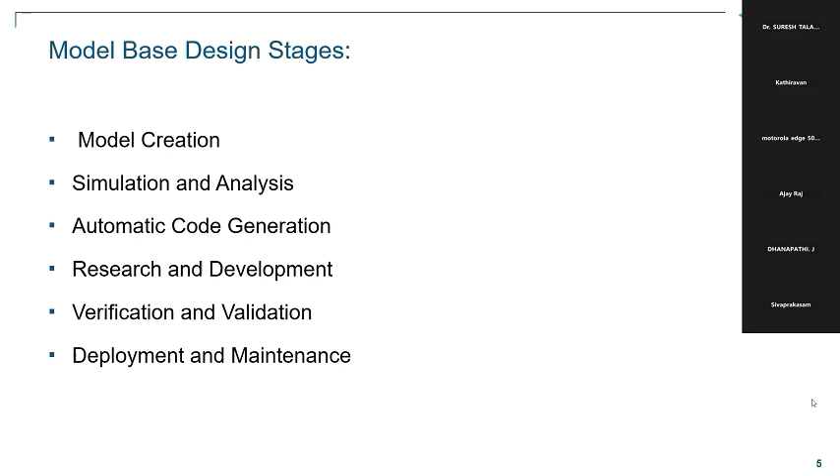In the development of this complex system, by leveraging the power of abstraction, simulation, and automated code generation, these three things can be directly achieved when you are adopting this model-based design. So, coming to the next slide.

As we've been stating model-based design for a long period - what is this model-based design tool we're actually talking about? Which particular tool are you concerned about? Actually, we have one such tool, but there are several other tools in the market as well.

Many tools are in the market supporting this model-based approach, like LabVIEW and SolidWorks - they support model-based design. We have one tool from MathWorks called Simulink. MATLAB - we have three products from the house of MathWorks, I think most of you know this. The first product is MATLAB, the second is Simulink, and the third is SimScape.

So out of three, Simulink and SimScape will give you that flavor of model-based design. MATLAB is a traditional software which has been in the industry for more than 40 years. Wherever you need mathematical support or complex mathematical analysis, development of algorithms ranging from simple to AI, we can do with this MATLAB software.

And Simulink gives you a flavor of a block-based environment. So everything will be in Simulink. Most of you have a handful of experience with this particular software. Here you have the blocks. Everything will be available as blocks. Just pick and plug these blocks, connect them, set the parameters, and you can play with them. Once you are ready, you can simulate.

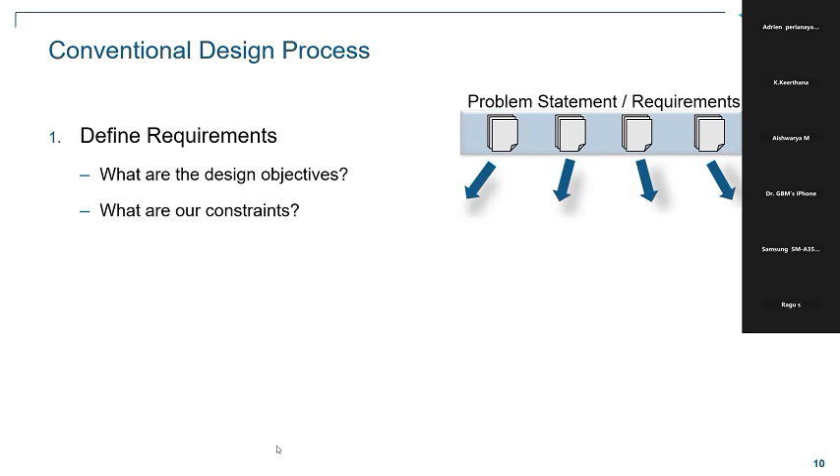The second level will be the component design, and the third level we go for system integration. We need to fuse hardware and software and make a system out of it, that we call an integrated system, which works with hardware based on support from software commands, and the hardware will work. So we make an integrated system, and finally we will test it.

So this is the conventional design process. We need to identify the requirement and go with the component level designing, do system integration, hardware software integration, and go for testing. So this is our conventional design process for any type of automobile manufacturing.

So today we are taking a scenario of EV car, which is very trending now, right? So what happens? What is the problem? Here you can see each stage has a different problem.

If you take the requirement phase, the analysis on that requirement - whether whatever choice we have made is right, whether the component we have chosen is right, and integrated with the design, whether the component we have thought of and the design we have made,

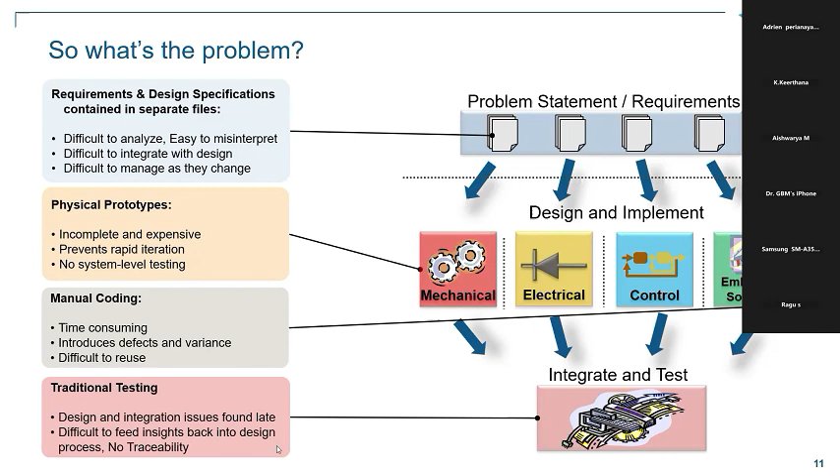Suppose you are moving to a new version of the model - if you don't have an integrated platform where hardware and software can be tested together, then no traceability will be there, and your learnings will not help for your new version. That's why aftermarket products are getting defective if you are not using this methodology of model-based design. So those are the problems.

So as I was stating, you need to fix on the requirements. If you fix the requirement properly, you'll be left with only about 10% of issues to fix during testing. So in the conventional methodology, you need to ensure your requirement and design cope up 100%. Then you won't need to worry about testing.

Yes, how to achieve it? That's the next question - how will you actually achieve it? How can you ensure your requirement and design are working properly, and where can you test that your hardware and software are working fine? How can you reduce the deployment time of your software or program to your model, your control system, automation, car, or whatever your product is about? How can you reduce the time between hardware-software mapping, and how can you reuse your existing model for the new one? That is very, very important.

So if you see here, this graph gives a glimpse of how error can significantly make the project go down. Here we have given the phases - in this graph, the y-axis shows the relative cost to fix an error.

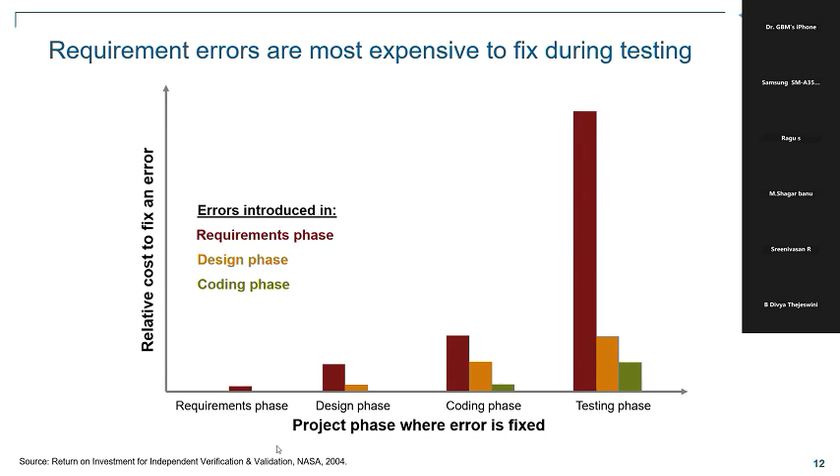Here this model-based design will come into play. This will help you to fix it actually. You can share it. You can take a model-based design tool like Simulink and Simscape, or you can go with other software like LabVIEW and SolidWorks, which help you make these simulations. Multi-domain simulations will help you.

You can actually build a model in that particular software, and you can make some easy integration. You can actually do that with the software, and you can check whether your requirements and designs are okay.

That's where nowadays we are getting new products. Within 3 months we are getting a new version of mobiles available. Within a year we are getting a new version of cars. How is it possible? By adopting this technology called model-based design.

What is the stakeholder's idea? What is the idea behind it? Go to the software, open this model-based design tool like Simscape or LabVIEW or SolidWorks — there are several other software also. You can open those software and try to build that integrated model along with your electricals, controls, software, and mechanical parts.

Just to give a heads up, Simulink will give you all the control platforms, and SimScape will help you work on real environments like mechanical systems. If you want to build a robotic system, yes, all your robotic parts are available under SimScape tools. You can take that SimScape product, download it, install that version. You can build your entire robotic model in SimScape, and all your control systems can be built with Simulink.

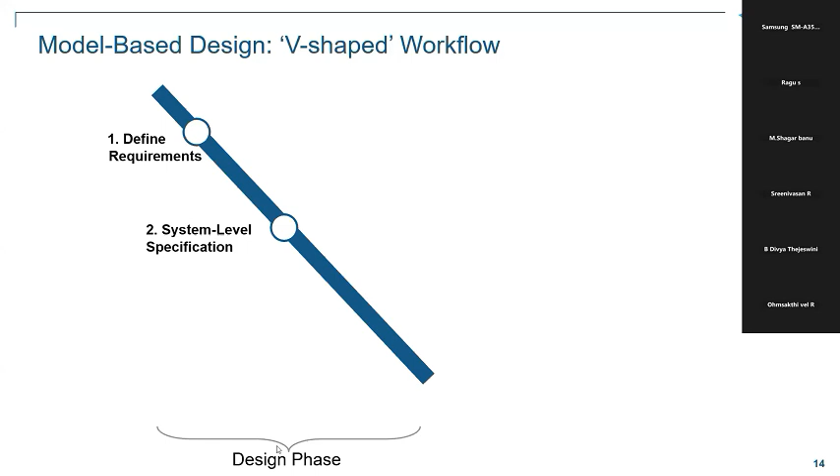Coming to the very important concept for this model-based design, called the V-shape workflow. I hope I am very clear with the concept we have discussed on this model-based design. So what is this V workflow? Why has this rapidization happened in this industry in the past decade?

We can see a lot of things happening, rapidizing, and everything happening at a very fast pace. How is this possible? Have you ever thought how an engineer or technology people can give a product in a very short notice, with high quality and features, at a very low cost? How is that possible?

Most of you have experienced this - people who purchased a mobile phone like 10 years before, for that cost we paid, we got only very basic stuff available in that communication device. But what happened now? Even for a very affordable price, we can get everything available in that mobile and communication tool.

If you look at automobile cars nowadays, slowly you can witness EV car prices getting below 10 lakhs. Slowly, down the line within 5 years, you will see even your kid will have an EV car, with AI power. It will automatically make the drives and take them wherever they want to go. Down the 5 year line, we are going to see all this stuff.

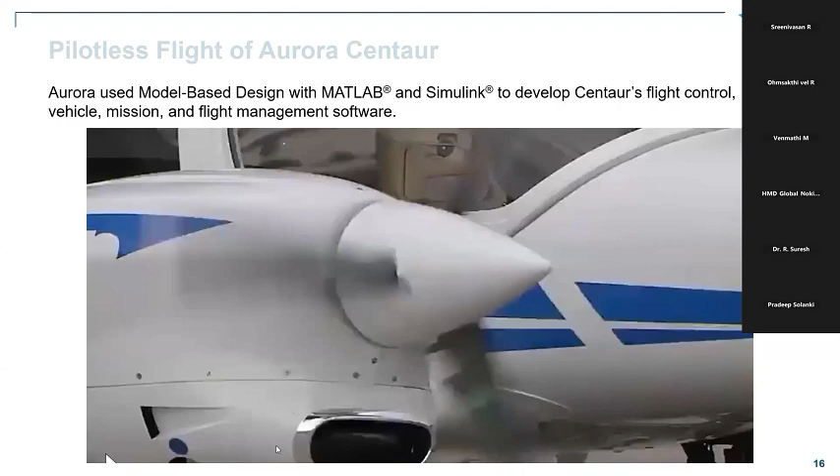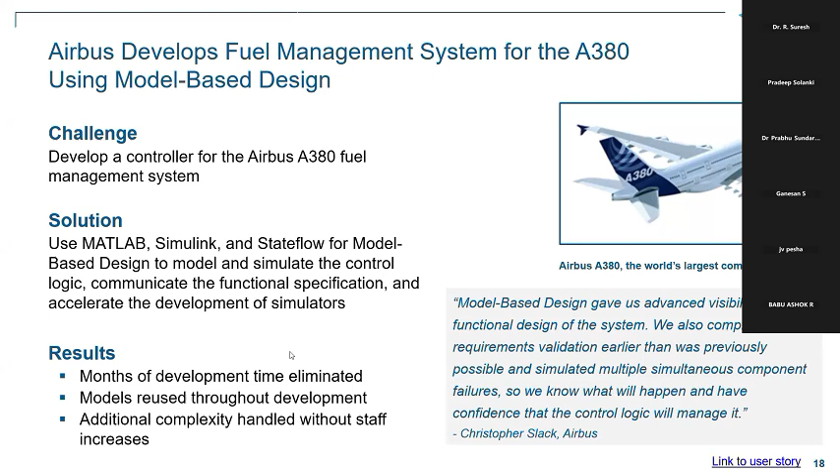So now we have some idea about this software, right? We have already discussed this. So that's all about your model-based design.

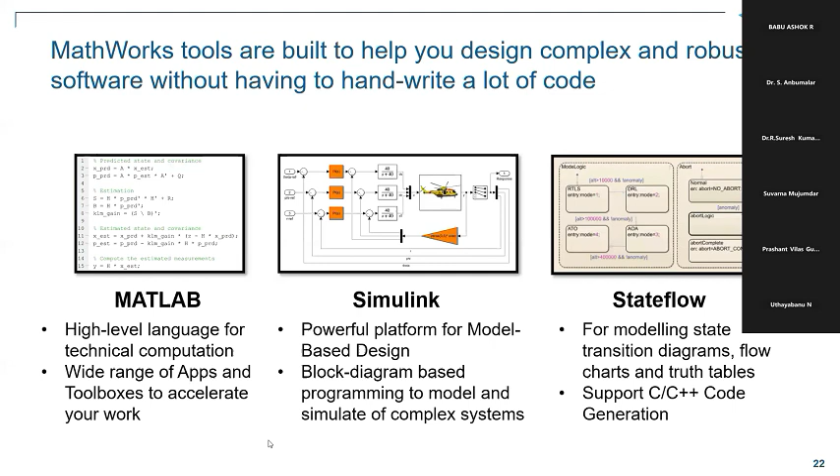That is very simple. MATLAB gives you an option to go with MATLAB Academy. You can just type www.mathworks.com and reach there. There are several self-paced courses available, called on-ramp courses. You can do these courses and understand how to actually start working on this tool. Once you complete them, you will get a proper certificate, and you can start working on this tool for your own model-based development.

Nowadays we are concentrating on several web series available for you, where engineers and tech people can reach us and start doing their own work in their own domain-based expertise. They can come back and check with us, check with our workshop series, and start doing work along with us. We have created resource-based things where you can sync up with us and also grow with us.

That is also possible. And at Manakula Vinayaka, we have a campus-wide license. They are a very long-standing partner with us, and we have set up several trainings and workshops along with them. So people who have the facility to reach Sri Manakula Vinayaka College of Engineering, whenever we conduct a workshop, please reach out to them. We can actually collaborate, and that's how the learning should happen.

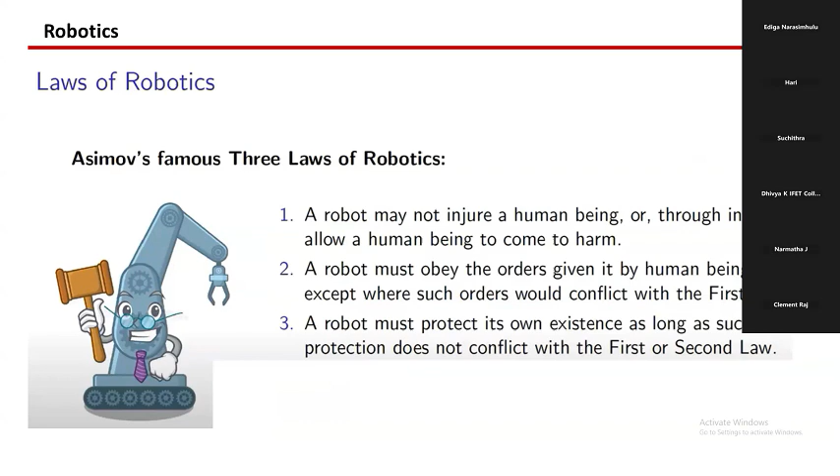So usually here today we are mostly talking about industrial robots. I am going to talk about their evolution.

The first stationary industrial robot was called Unimate. It was invented by the American engineer George Devol - he first invented this industrial robot.

Later on it was developed by the Unimation Inc. company in 1956, by American engineer Joseph Engelberger. He developed this particular industrial robot, then introduced it at Unimation Inc. Also, the first prototype was implemented at General Motors Corporation in 1959, for the die casting factory.

The first production line serial robot was delivered to General Motors in 1961 by the Condec Corporation. Condec was an acquisition of Unimation Inc.

So coming to the thumb rules on deciding robotic uses - there are four environments where we will try to replace human efforts. For example, if the task is really dirty, you can use a robot. Or some kind of dull environment - dull meaning repetitive work.

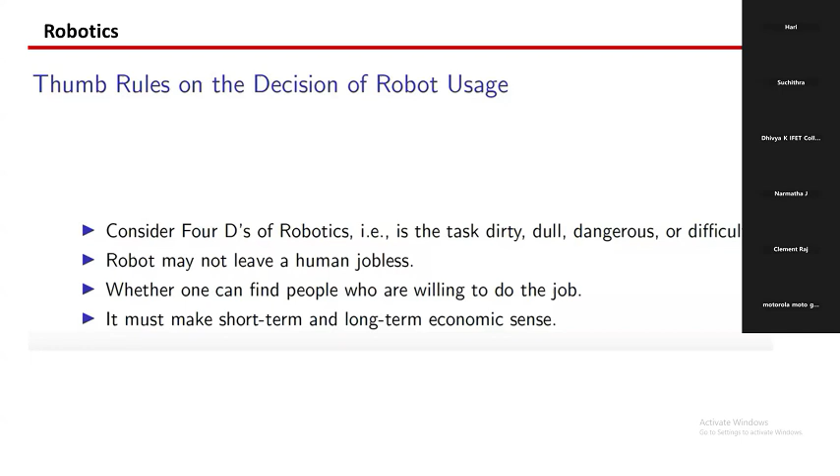But at the same time, the usage of robots should not leave humans jobless. One should find whether people are willing to do the work, and consider how it impacts in the short term or long term economic sense or industry point of view. Based on this thumb rule, you have to select it.

For example, in case of industrial robotics, we can find many areas where people use robotics nowadays. Initially they found it in welding - robot welding, spot welding - also material handling robots. They are using it in picking, painting, and assembly. These are all the applications they have used.

Maybe it's better if I show some video from YouTube - I hope a lot of data is there that might be useful for us. Like, you can show the application here.

So you can find it here. Basically, they are using it for spot welding. You can see how this robot is doing the spot welding, and material handling, like how this cup is exchanged.

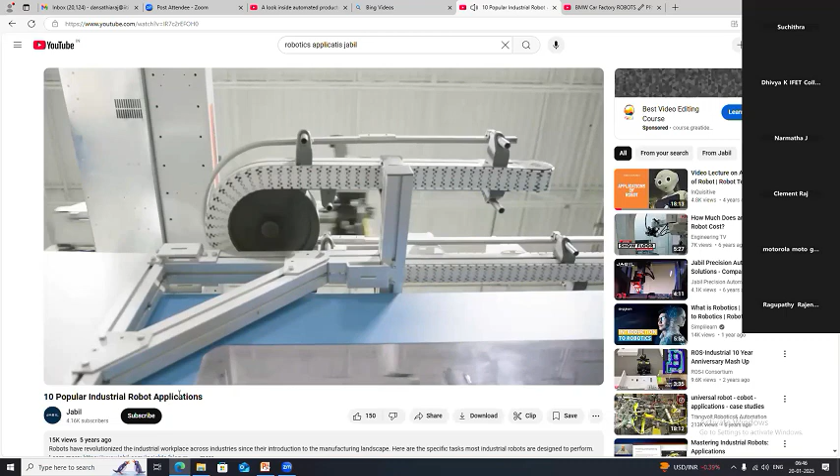You can see machine tending, meaning kind of machine tools. It is used for different machining operations, like different machining tools are there, and it handles these tools. Here they are using it for painting, like this automobile body is painted here.

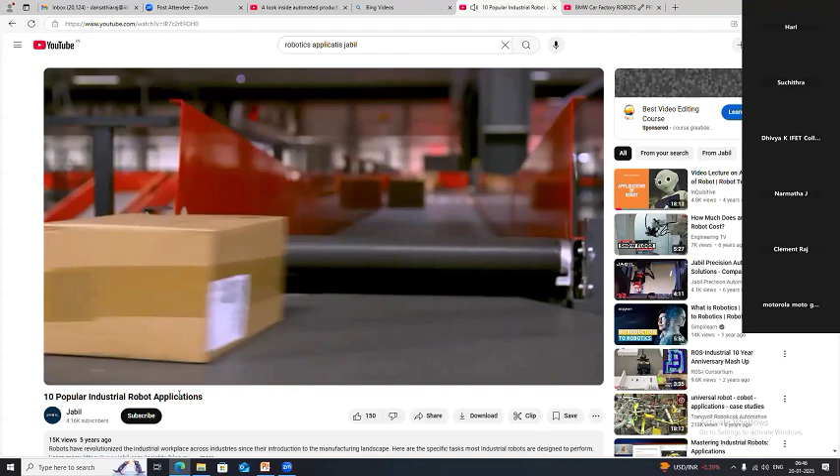You can see here, also this packing, picking, this kind of application, one conveyor to another conveyor it is transferring. Assembly, how it is used in assembly, you can see here.

Also some mechanical cutting and polishing operations, how it performs. You can see the different cutting operations, laser cutting operations, some polishing operations. It is also doing some kind of adhesive sealing, like gluing, just attaching the parts together, kind of assembly operation.

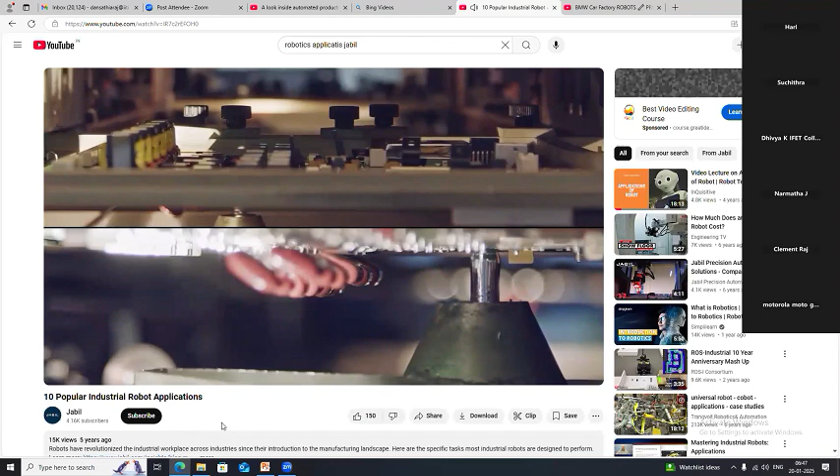Again, it is spraying. Some other applications also, like we can find PCB board assembly. I hope you may know about the PCB parts, made up of very micro electronic mechanical components. For that, we can use this robotics in different applications.

Apart from that, we can use it for medical robots, mining, space robots. These are all advanced applications, like underwater exploration. Nowadays, even our defense has made defense robots, which basically act as a bomb defuser wherever a dangerous job is involved, so it can defuse the bomb. I hope you know the UAV Netra, developed by the DRDO.

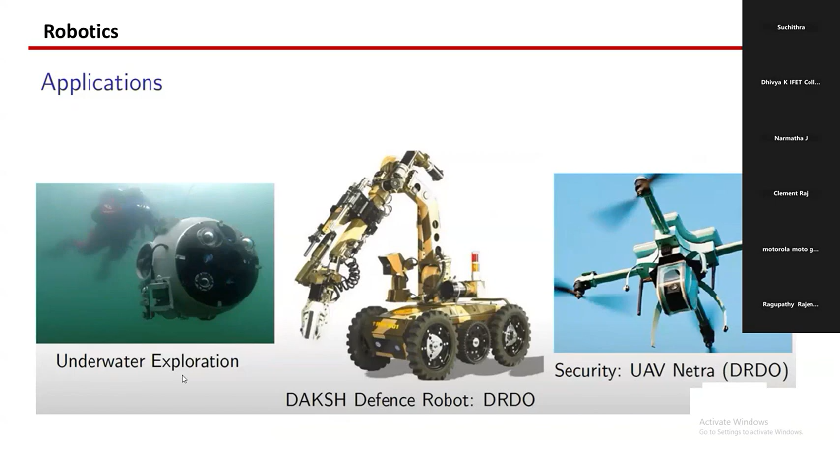This drone is basically for border application, like border surveillance, which DRDO and defense are using nowadays. So these are certain applications of robotics. Also, some robots are used for rescue from ice, and some robots, the bots, are made for agriculture, which can be used for seeding purposes, like it can remove the seed, those kind of operations it can perform.

Like this, in many areas, you can find industrial robot applications. But if you come to the industrial application, here our talk is basically confined to the industrial application.

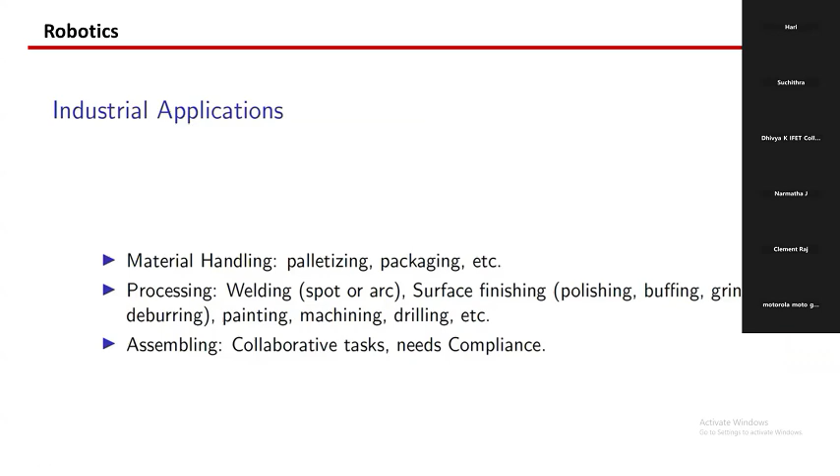From an industrial application point of view, there are three types. One is material handling, where palletizing and packaging are very important. If you come to processing, there are a variety of processes, like welding, machining, or surface finishing, painting, drilling - many operations are involved. Assembly means it has to do some kind of collaborative task and basically needs compliance.

There are two types of robots basically, serial and parallel robot. In industry, we mostly use industrial serial robots. For example, mostly if you take the serial robot, what I'm trying to say is the link is connected to the arm again. For example, if you see the right side diagram, the base is there, and one arm is connected.

Again, the second arm is connected with this link. The third arm is again connected. Then the tool will be connected here. This is basically the pick and place tool, the fifth one I'm showing here. There it will act as an end effector tool.

Here, this end effector, based on usage, you can change this tool. Suppose if you are using a grinding operation, then you can put a grinding tool. Suppose if you are doing a painting operation, then you can keep a spray gun here. Suppose if you are performing a welding operation, then you can place a welding gun in the end effector tool.

So it will act as an end effector tool. Basically, the manipulator has a serial or parallel arm, which is called a robot manipulator. I will tell you what a parallel robot is also. In the serial case, you just understand that it is serially connected, the links are connected with the arms. Then in order to operate these links, we need a controller, right?

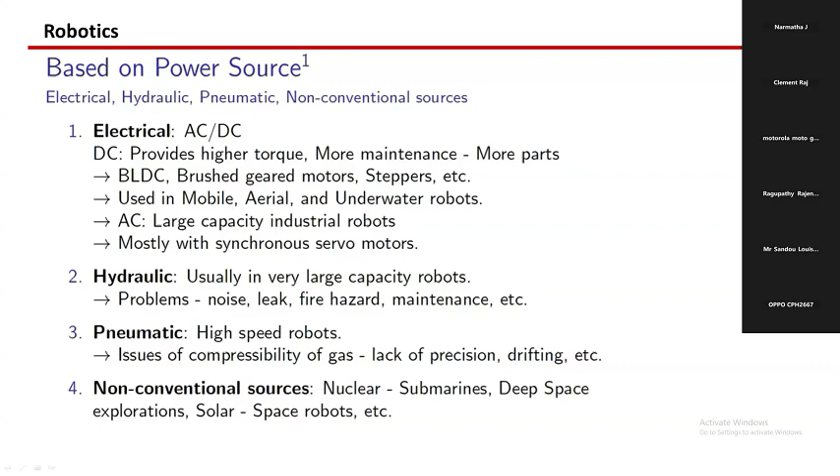Also, apart from hydraulic and pneumatic, you can use non-conventional sources also, like nuclear power or solar. Solar robotics is also nowadays very popular, so you can use those things.

Also based on workspace geometry, you can make it into different types. For example, I can divide into Cartesian robot. Cartesian means nothing but here it has three linear actuators, x-axis, y-axis, z-axis moving in linear, so basically it is a prismatic movement, that's why it is called 3P, like Cartesian means PPP. Mainly this is used for heavy loads because it is very simple to control and easy to program also.

Second one, suppose the workspace looks like a cylindrical shape, that's why it is called a cylindrical robot. Here only the x-axis is fixed, the base is fixed, so it is not a linear movement, it can rotate, and also the y-axis can move and the z-axis can move. That's why one revolute, because here we use one rotary actuator and two linear actuators, that's why it is one revolute and two prismatic, RPP, it is called RPP.

So in that case we can give a more large payload, and it is a very rigid structure also. Third case, we can use it for a very large range because it is a spherical kind of workspace. For example, there are two revolute here, like X and Y, kind of revolute or rotary actuators, and the Z-axis only has a linear actuator. In the third case, all the joints are kind of rotary actuators, like an articulated arm, that is called triple R.

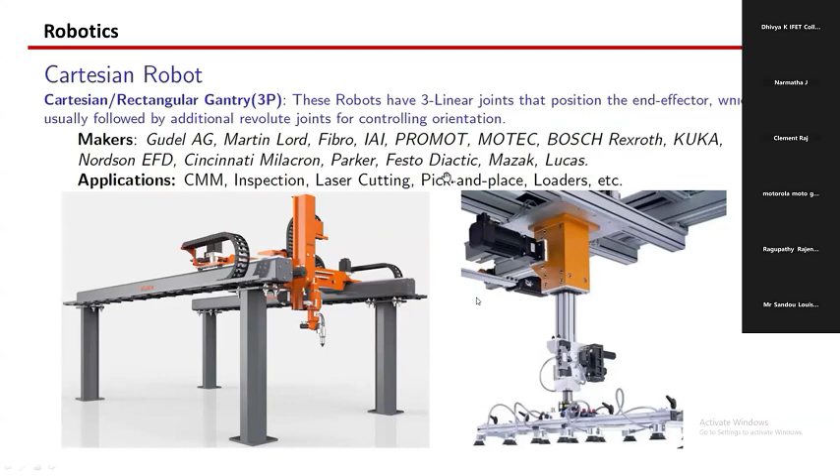Spherical robot, again mostly it has two rotary joints and one prismatic joint. You may have an additional revolute joint in the end effector, you can keep it as a holder. But the thing is that it lacks the vertical axis movement, so it can only act as a tool. You can load it, or use it as a specific pick and place robot. Like basically the first Unimate they made, that is a spherical robot.

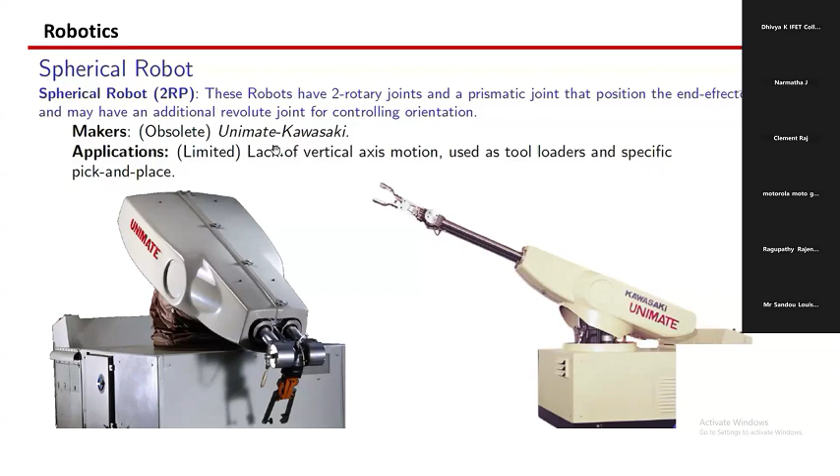Again, with respect to degree of freedom, also you can say it is planar or spatial. Planar means it may have 2 degree of freedom. Spatial means three degree of freedom, or a rotating robot, or 6 degree of freedom means it has three translation and three rotation. It has it like this way.

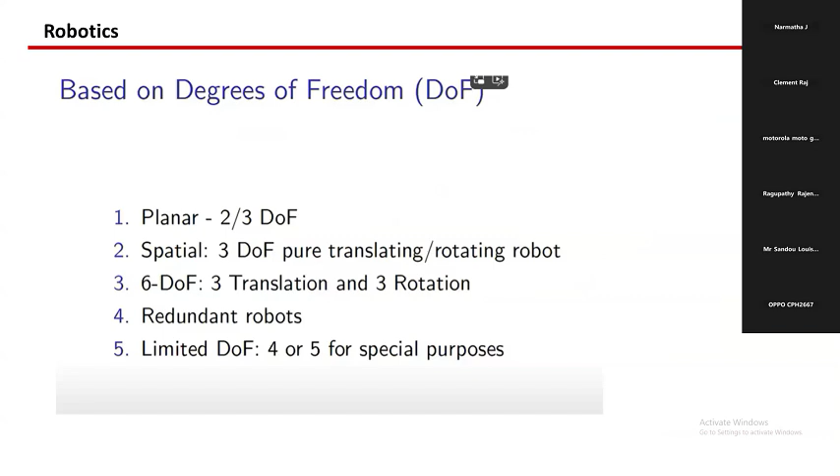For example, maybe I can show the video, maybe you may get some idea.

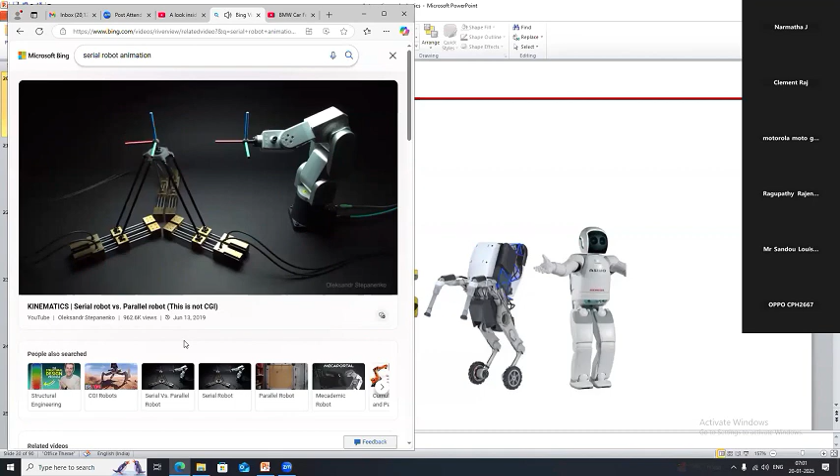So what is this serial robot? See here, the axis is moving parallelly, that's why it is called a parallel robot. Okay, so hope you got the idea about it.

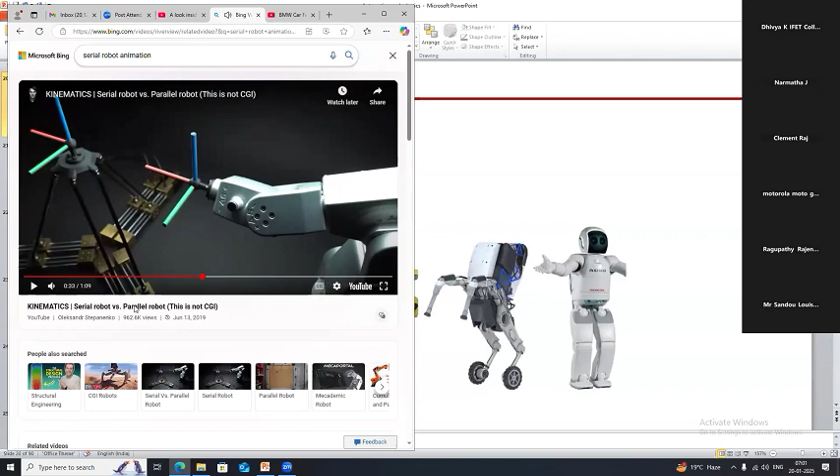Again, in the hybrid case, basically it is a kind of tree type system. So these are all based on the kinematic structures we can classify it.

Also based on movement, we can say it is a fixed robot. Robot means it may not always move, some robots can be fixed in a certain place also, with no movement involved, and it is still called a robot. In some cases, mostly the mobile robot might have wheels or omni wheels. Omni wheels are mainly used in carriage systems, or we can find it in space applications. The third one is the swimming robot or underwater robot, or it can be flying also, the aerial robot can fly also. So based on the movement, we can again classify it.

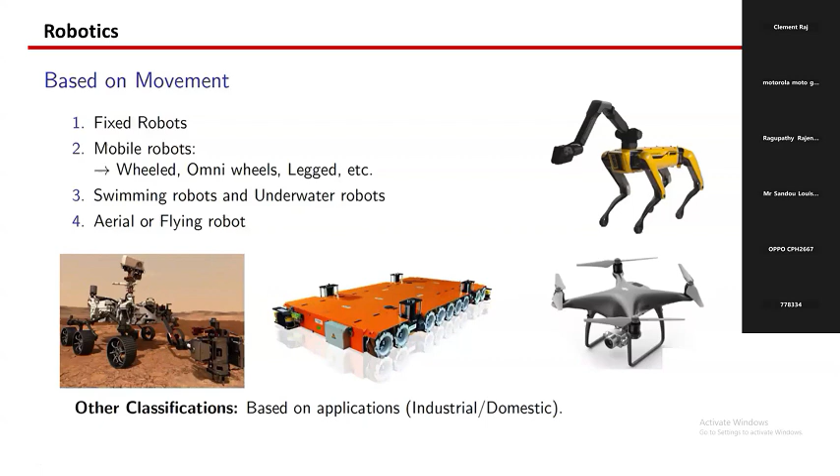So based on the application, whether it is industrial or domestic application, we can classify it in this way. For example, already I told the serial robots are mostly used in industry because it is very easy to program, and also very easy to balance the heavy load, like the payload, we can easily balance it based on the programming because of the Cartesian translation. It is very easy to control point to point, the point-to-point control is there, it is very easy, that trajectory will work like this.

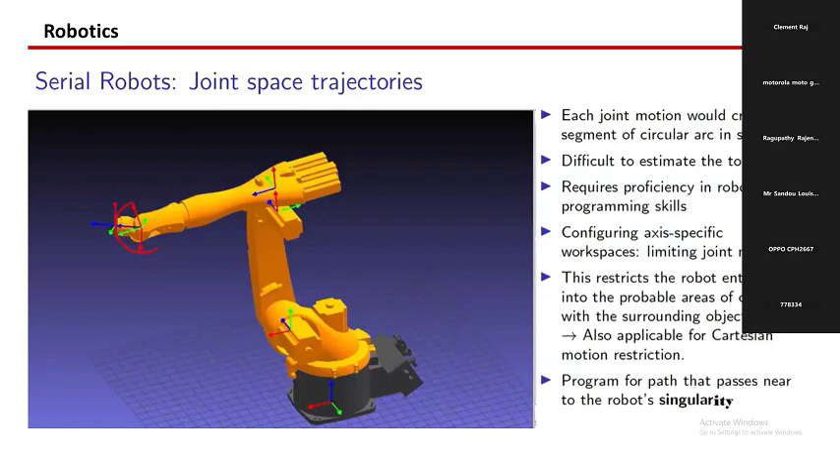Also, the joint space trajectory, in case only the end effector can rotate, it can create a circular arc in space. So it is difficult to estimate the tool path and programming based on this programming skill. We can easily configure specific workspaces that restrict the robot from entering into the probable area of collision with surrounding objects, so it can be applicable for Cartesian motion. The program path passes through the robot's singularity, so in that way you can avoid that interference.

So now I hope you could understand a little bit about the basics of robots and classification of robots, and what is the usage of degree of freedom, and what is a parallel robot, or what is a serial robot. Those ideas you may have gotten.

Now I am just going into automation again. When I move to automation, what I'm going to do is start with automation in manufacturing. Then we will integrate both automation and robotics. Before going into that, I will tell you the general meaning of automation in industry, or automation in production. Then only we can understand the integration of automation and robotics. I hope if I give this idea about automation in manufacturing or production, certainly you can easily understand the integration of how to integrate both. You may get some idea.

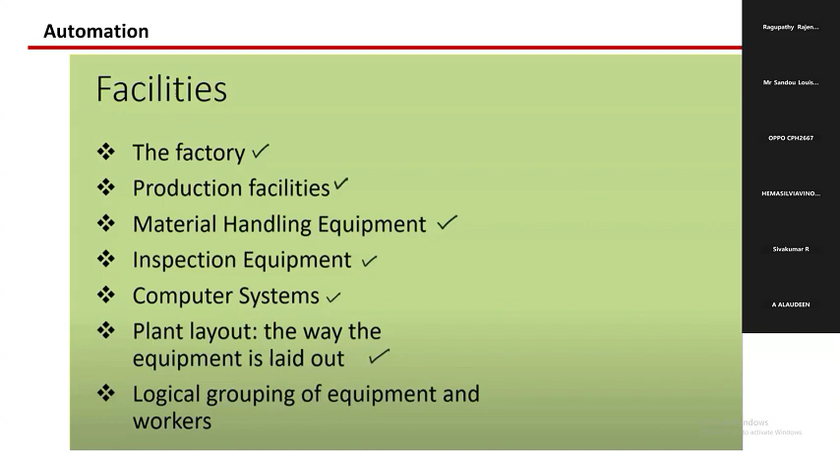Also the plant layout is very important - the way how the equipment is placed. When you go for big industry, it can range from small scale to very high scale. If you're going for a very big scale industry, you have to consider how the equipments are placed, the logical grouping of equipment, and how the workers are divided. These are all very important.

For example, if you come to the facilities, it basically includes the factory, production machines, tooling, material handling equipment, inspection equipment, and controllers that control the manufacturing operations.

If you go for a high scale industry, plant layout is also of prime importance. That involves how the equipments are physically arranged in the factory, because that also plays an important role in the manufacturing process.

This is basically how the equipments are organized - that is called a working cell, or work cell, basically.

For example, you may start with a single production machine, meaning very small scale - it may have only one machine, and you can produce the product out of it. For example, paper cups can be produced by only one single machine. A plastic chair can be made with only one single mold.

Again, if you need a collection of machines, then the production line comes into play. Once there are several parts involved, then you need to do assembly also. For example, mobile phones or automotive - if you take any small car, it may have so many components, thousands of parts. So we need an assembly line.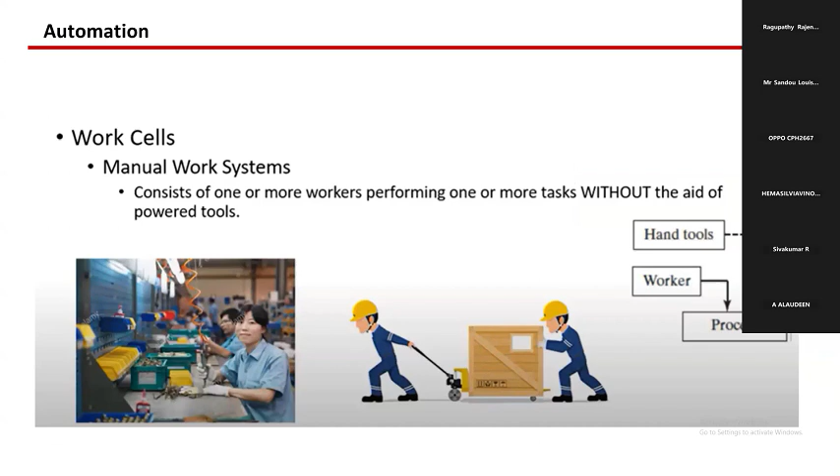In some cases you may need both interacting, like a worker-machine system. For example, in a worker-machine system, only the machine tool is operated by someone like a machinist. For example, a lathe is there - using the lathe, you can fabricate any kind of desired product out of it.

For that, the worker needs to be skilled labor - he needs to be a machinist. Only then can he operate this lathe and perform these operations. Again, for welding, he needs to be a welder. Only then can he operate this arc welding. So here the worker-machine system is really needed.

That's what I'm trying to say - here the human works on powered equipment. In the manual system, they won't work on any power tool, only hand tools. But in this case, they are using the power tool in production.

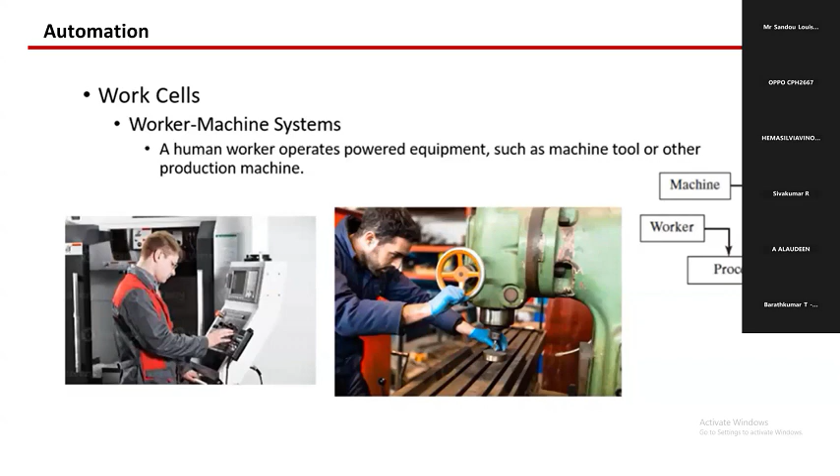But that was the second case. The next case is where it is mostly completely automated - without any human interface or direct participation, you can perform the operation. You can just monitor it after each process, or perform some portion of the work cycle - that is called semi-automatic, meaning it can perform a certain operation, but for the next operation the human should dismantle it and keep it in the other operation station.

If it is fully automated, meaning it performs for an extended period without any human attention, then it is called the automated system. Automated means the machine works without any direct participation - you give some kind of programming, and the control system controls each operation. For example, here I mentioned this engine lathe.

Instead of engine lathe, there the human intervention is like we have to keep the tool at the correct position, and for the raw material we have to apply the correct force and direction. Then only it will make the desired shape.

So here, by the programming itself, the robot will select the tool and place it in a desired orientation such that it will remove the material and come to the final shape. Without any human participation, it will do the work, running on an automatic cycle. That is called a fully automated system.

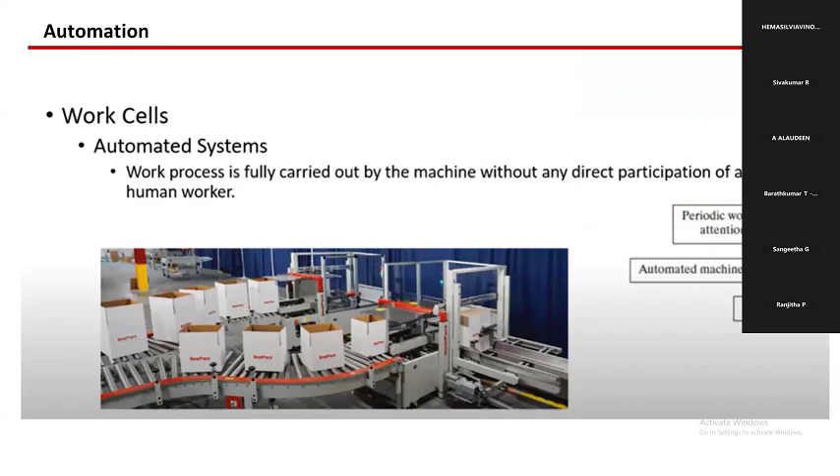So why automation is very important is because it plays a very important role in the production life cycle. For example, take the Maruti 800 car - production continued up to 2014. It started in the 1980s, so almost 30 years it ruled the industry, like 3 decades.

Also if you take the Ambassador car, it is from 1958 to 2014. This is also almost more than 50 years, like 5 decades it came to the market.

So usually the product life cycle will go like this - growth, maturity, then decline. But nowadays, if you take any new car, for example any Tata car, every 6 months, or even Maruti Suzuki, every 6 months they come up with new models and keep adding features.

So each brand now has a very short life span. The life of the product is very short span.

And also, for example, if you take mobile phones - initially we used Nokia, which is very popular. In the market, a variety of models are there. Again, if you take each model, within 2 to 3 months you will get an update. The product is constantly changing, and the product life cycle is really very short nowadays.

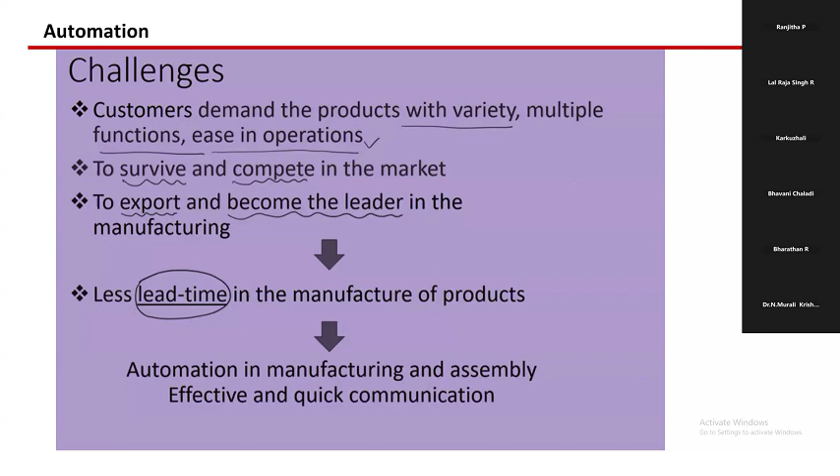So for that we need automation in manufacturing or assembly, with effective and quick communication. This is really a big challenge involved in automation.

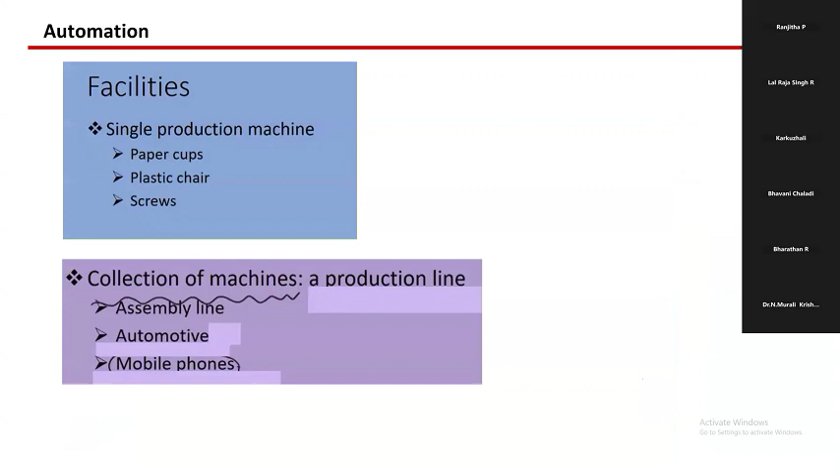Now in automation, mostly I will talk about the facilities and workplace, but not only that - the manufacturing system is also involved. The manufacturing support system is also really very important for the production system.

Manufacturing support system means the design and manufacturing process - basically it is called a support system. For example, it starts with marketing - based on the customer need, you have to do a design specification, and based on collecting information, you have to do a feasibility study, then make a prototype. After the prototype, you have to analyze the design and optimize it.

Then we have to do some kind of documentation like CAD and CAE, which is called CIM - computer integrated manufacturing. Based on that, it will generate the process planning, then it will come to production.

Again, production basically involves all the facilities. Then you have to give production quality control, you have to do inspection, then it will go for shipping.

So always this also involves product design - not only facilities, the manufacturing support system also has a very important role.

So facilities means the people working in the factory, like factory layout or manufacturing system - basically it is called a blue collar job. Those working in the manufacturing support system will be involved in design, business functions, or manufacturing control.

That is called a white collar job, basically.

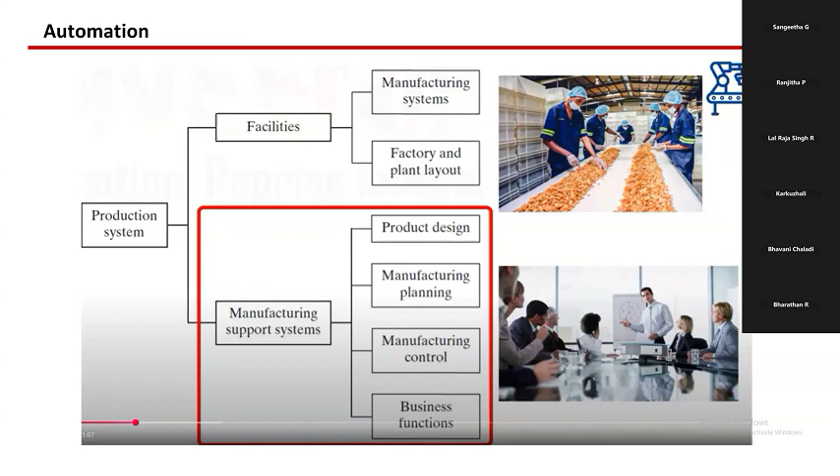Now coming to automation, there are three types of automation. One is called fixed automation. In fixed automation, they produce one type of product, meaning the product is fixed, but you can make any number of that same product. For example, if you want to make a screw, you can make that same screw in any quantity.

Programmable automation means you have to change the process according to different shapes of the product. For example, one product may need a screw, some drilling, some milling operation, some cornered edges. Then we need a program for that, and the programmable control automatically performs the automation. In this case, we cannot make very high quantity; it will be a lower quantity.

In between these two is flexible automation, where you can make a sequence of operations and based on that do some complicated objects. I will explain more about flexible automation in a future slide.

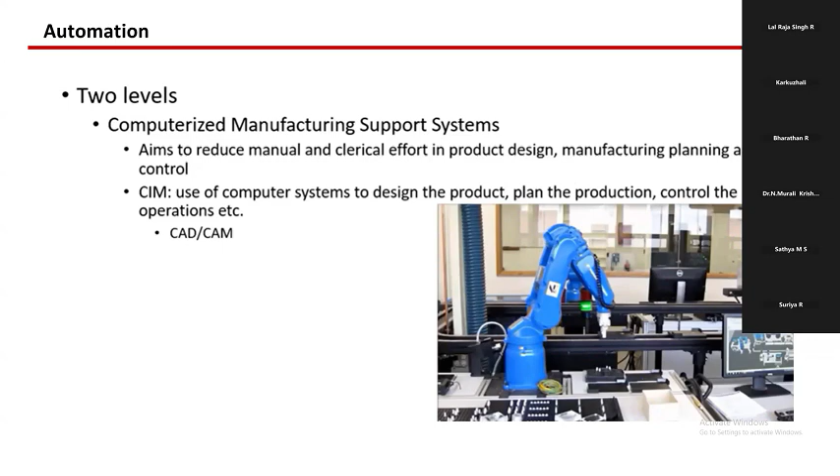So what I'm trying to say is there are two levels. Basically, this computerized manufacturing support system can reduce human effort. It can automatically do product design or planning. That is called computer integrated manufacturing. Like I said, using CAD software we do the design, and CAM produces the machine language and converts it so it can perform the operation.

So basically, the application of automation is to increase productivity, labor productivity, reduce cost and labor shortage, and eliminate manual and clerical tasks. Also worker safety, product quality, and reduced manufacturing lead time. These are the main important points of automation in industry.

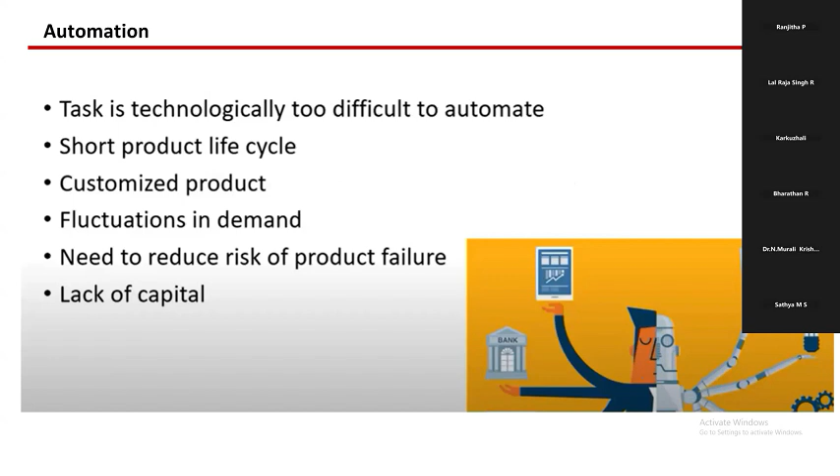If a task is technologically too difficult to automate, then you may go for manual work instead. Automation may also be needed to reduce the risk of product failure, or when there is lack of capital. These are all certain advantages.

When it comes to automation principles, there may not be a direct answer always. The principles and strategies may not give a direct answer, but these strategies are very important to keep in mind when handling automation in industry. One is the USA principle, then automation and process improvement strategies, and automation migration strategy.

USA doesn't mean United States here. It stands for Understand the existing process, Simplify the process based on that understanding, and then Automate wherever we can simplify the process. That is called the USA principle.

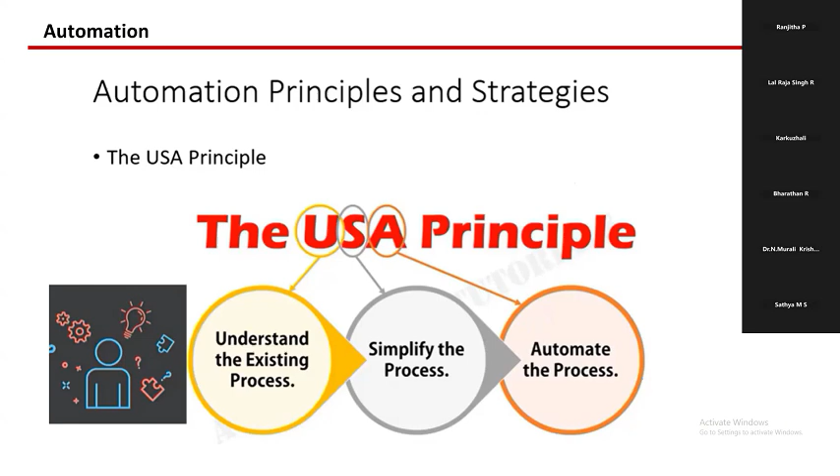The second is the strategies I mentioned, which has about 10 strategies. First, it starts from the operations - how we can perform different operations, like combining or doing them simultaneously, or integration of operations. Then we have to increase flexibility. After flexibility, we look at how to handle and store material. Then we do the inspection, either online or offline - online inspection we have to do. Then we can optimize automation through process control and optimization.

Finally, we can implement plant operation control, then come to the CIM. These are all 10 strategies of automation strategy for process automation.

Migration strategy means: if you are producing a very small amount of product, we can go for manual production since manual always needs very low cost tooling. Phase two is in between automation and manual, where it may have single automated cells with manual handling of product between workstations - some operations automated, and material handling done by people. Automated integrated production involves a multi-station automated system.

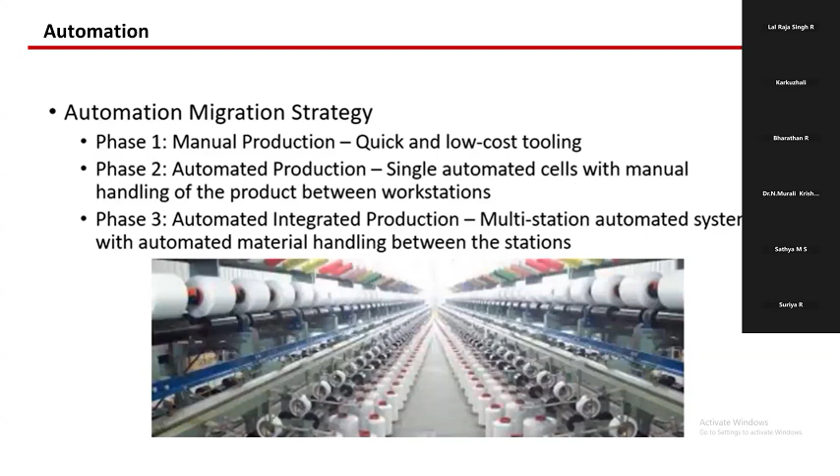Fully automated material handling happens between the stations. Based on product demand, you can do any of three types of production. For manual production, you need only one station cell. But for automated integrated production, you need connected stations, many stations, and material handling has to happen too, like here with the conveyor.

In phase two, we are transferring the working units manually. So basically what we are talking about is automated assembly lines. Up to now I was talking about the production line. Now we will talk about the assembly line.

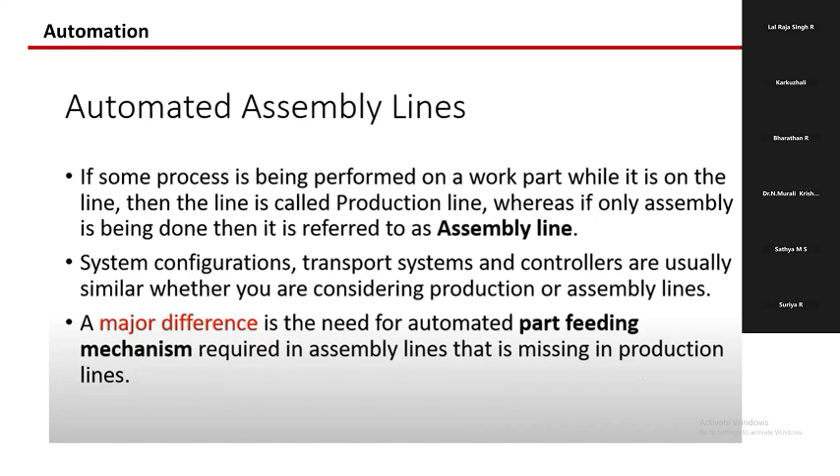There is not much difference, because the major difference is the automated part feeding mechanism you have to take into control. That is the part missing in the production line - the part feeding mechanism. In the assembly line, it can be a rotary setup, or all components can be added in one station, so it can be arranged differently.

Here they show automated assembly. As I told you, the feed mechanism is the thing missing compared to the production line. For example, here we have to deliver the part to the assembly work head from the base part. Suppose the base part is the yellow one, it has to be transferred into this red cap.

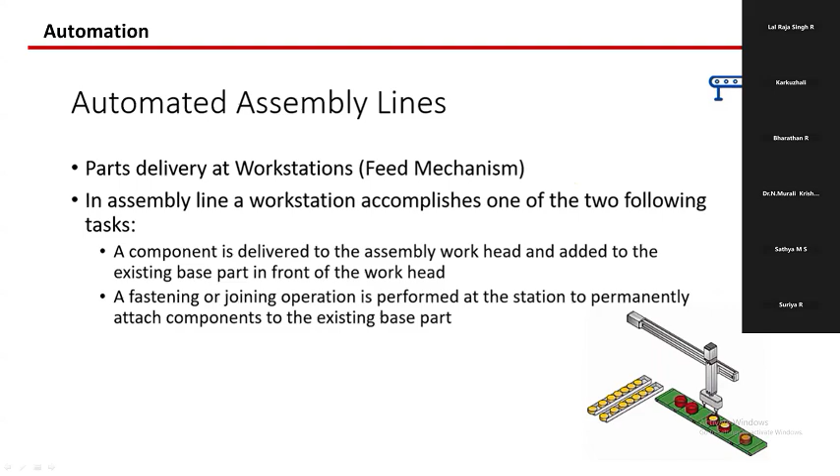So this is the assembly work head, and this is the part worker handling the base part. It can just be attached here. So how to feed it, that is the key question. For example, here they are using this feeder mechanism.

It mainly contains two different types of parts - one is the hopper and the parts feeder. The hopper is basically large, and it contains all the parts to be delivered. The parts feeder will remove the part from the hopper and deliver it to the assembly work head.

This parts feeder assembles parts in a certain way and sends them out in a certain orientation - that's also very important. The selector and orienter elements are important because the assembly work head needs all components assembled in proper orientation, otherwise it's very difficult to do the assembly.

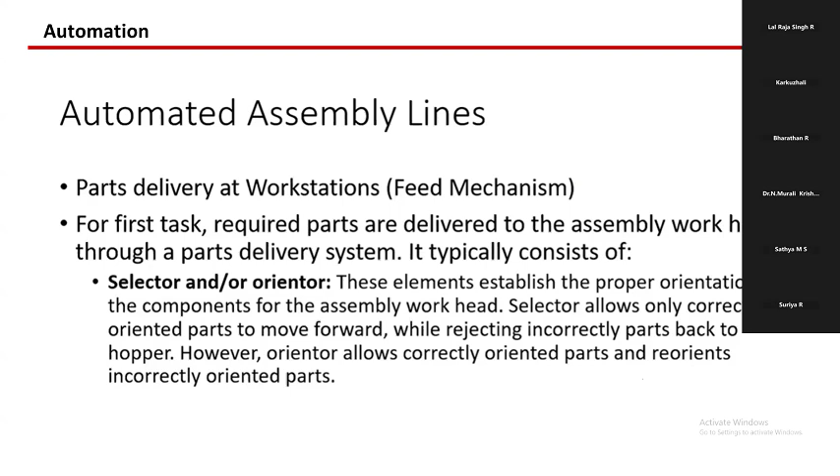For example, the cap should be kept upfront in the correct orientation. If it's in another orientation, the wiper blade will remove this cup-shaped part, and it will fall back into the hopper. Only once it's arranged properly will it go to the assembly cell workstation.

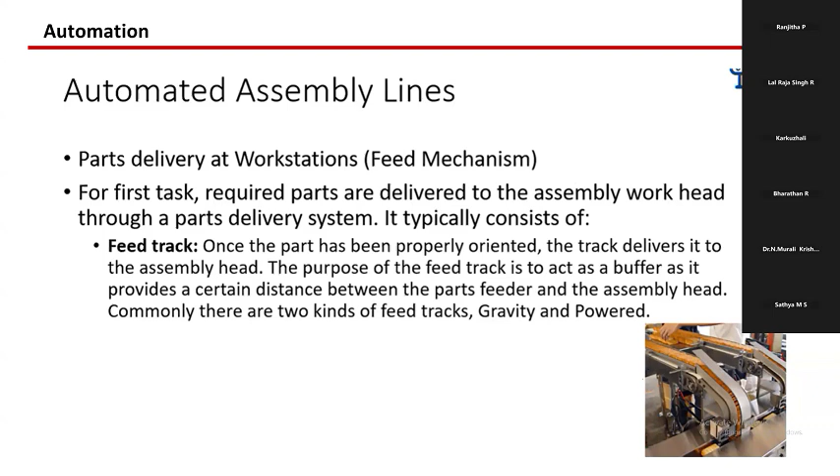Next, it has to go to the feed track. Once the part is properly oriented, it will go to the assembly head. The purpose of the feed track is to act as a buffer, providing a certain distance between the parts feeder and assembly head. It can operate based on gravity, or you can give it a push with some applied pressure or power.

So for example, already I told hopper and feed track play an important role. From the hopper, all the parts come. The selector and orienter will keep the parts in a certain orientation. Suppose if it is not oriented properly, then all rejected parts go back into the hopper. Only the arranged parts come to the feed track, then to the escapement point, and then it is placed in the certain work area where assembly happens.

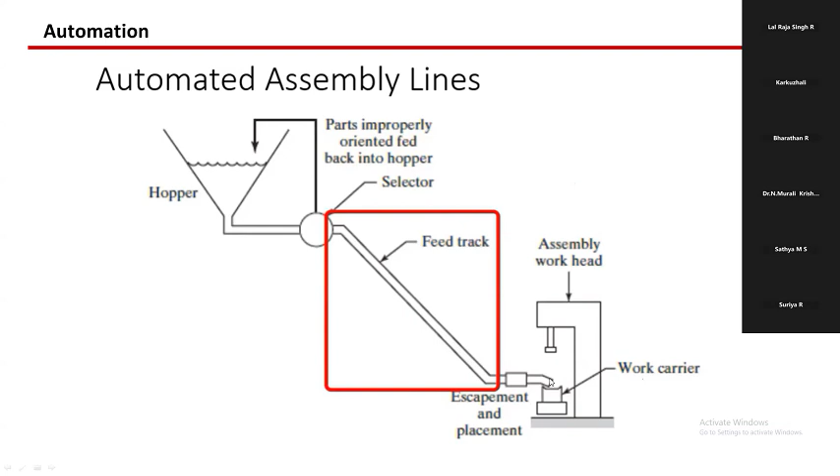So these are all certain automated assembly line examples. For example, ball bearings, ballpoint pens, electrical plugs, fuel injectors, gearboxes. All these can be made by automated assembly lines. Mostly this serial assembly line we use in industrial robots.

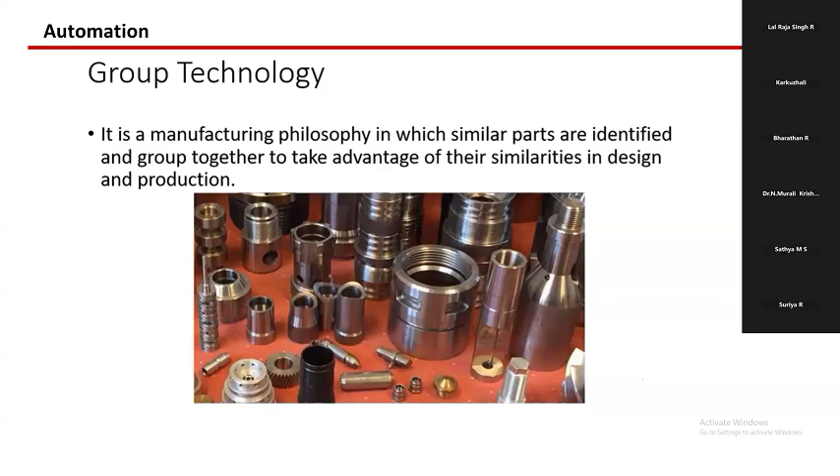So the next automation is group technology and flexible manufacturing. These are all advanced, next level systems. In this case, it will identify the manufacturing philosophy, that similar parts with similar kind of operations can be grouped together, and then it takes advantage of their similarity in design, production, or manufacturing process. Whenever it is needed, it recalls it and implements it for any new parts.

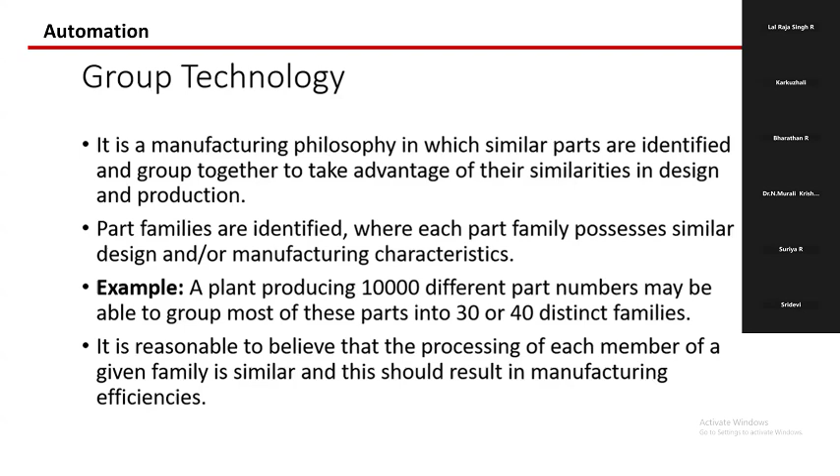So for example, if you are producing 10,000 different kinds of parts, suppose only 30-40 distinct family groups are following a similar kind of design or production. Then it will identify this and keep it in the buffer. So whenever a similar kind of product comes, automatically it will do the operation, then it will equip the machine cell.

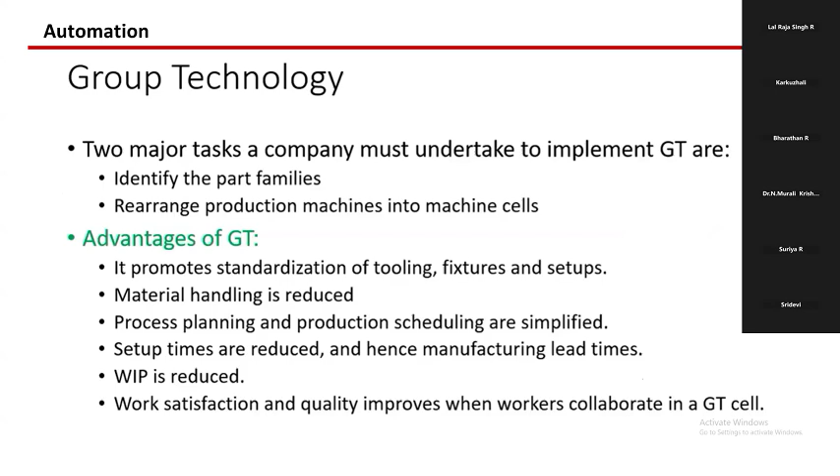That is basically called cellular manufacturing - organizing the production equipment into machine cells. So it can possible to group the parts into different families, mainly rearranging the machines into machine cells. Because of that, we can get reduced material handling, and we can do process planning. We can reduce setup time and manufacturing lead time. Also, quality improvement is very good - we can get very good collaboration in a group technology cell.

Next is the flexible manufacturing system. This is an advanced form of group technology machine cell, because it has more automated processing stations, meaning it has very high-end sophisticated CNC machine tools. Because of that, it can interconnect automated material handling or storage, which can be controlled by a distributed control system.

So again, all these are about automation in industry or manufacturing. You should know a little bit of background about this. That's what I told you. Now I'm coming to automation in control systems. We also have to understand this a little bit, because control systems also play a very important role in automation.

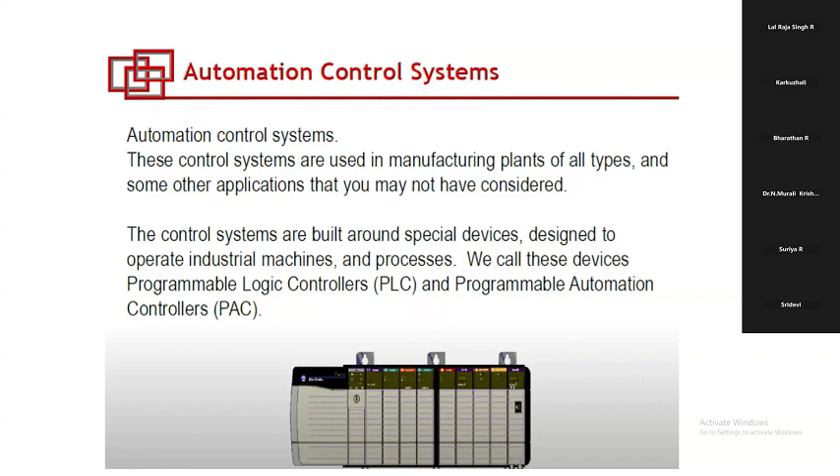So basically, in the manufacturing plant, it is built around what is called the PLC - programmable logic controller, or programmable automation controller, PAC or PLC. We call this device this. It is just like a VHS video tape or DVD. Both VHS video tape or DVD can record the TV program, but if you are using a DVD, it can be used for extra things like music also, data also, or other things also can be saved in the DVD, but videotape can only record the program.

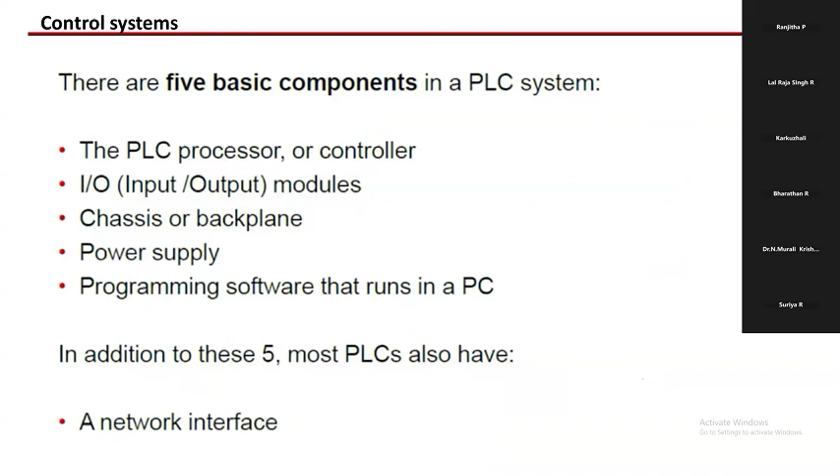Like that, a PLC is only designed to control machinery, but if it is an automated controller, it can control machine control, process, motion - you can use it for any other application. The basic components are: a controller, input-output devices, power supply, and programming software that runs on a PC. In addition, it may have some kind of network interface. Mainly this has three important parts: processor, controller, and CPU. Basically, it stores the control program or data in its memory. Whenever needed, it reads the status of the input devices, then executes the control program.

Then it comes in various physical forms. For example, the input-output module - here basically it is connected to the field device.

So that will convert the electrical signal into any input device's language, based on PLC language or machine language, whatever it can understand. Then whatever output coming from the PLC, it will again convert to the electrical signal. That output signal can be understood by solenoid valves or motor starters, so you can start the motor or activate the solenoid valve to perform operations. Based on that, it will perform.

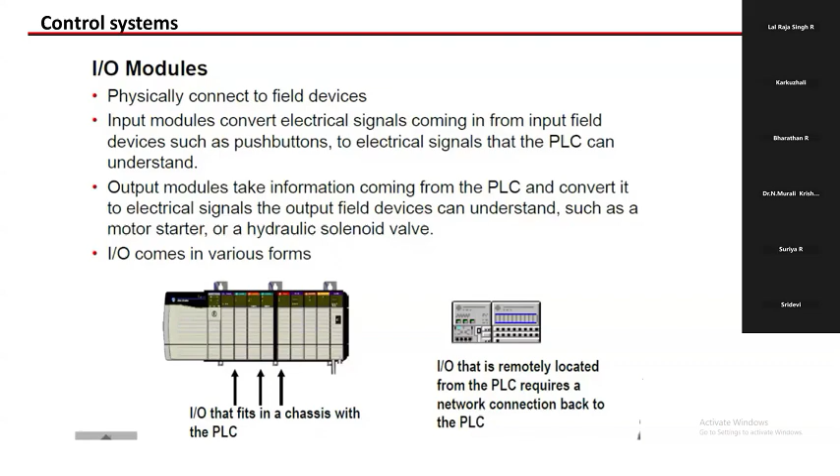So again, in the input module, there are different types of sensors. It can convert different types of electrical signals.

Now coming to the control system, there are two types: discrete and analog. In the discrete case, it will only use a single bit to represent the state of the device. In analog, it will use words to represent the state of the device. For example, in discrete it uses 0 or 1, like machine language - 0 means the switch will be opened, 1 means the switch will be closed.

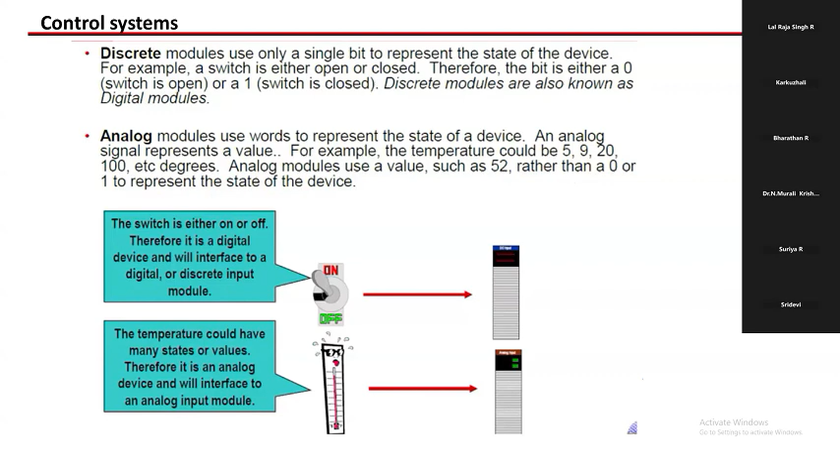But here it has a certain range - for example, temperature can go from 20 to 100, or even below zero. So for analog, if it goes above 50, the switch will be closed; if it is below 50, the switch will be in the 0 condition. That is the difference between discrete and analog.

Already I told about it. So mostly in the market, if you go for the discrete module, you may get 16-bit devices - 16-bit of memory. Even for analog also.

Again, the output module will interface directly to devices, then it will start the motor or light. Based on whatever application, it will give the output. It converts the electrical signal to what the motor can understand or sensor can understand, and based on that, it will operate the output.

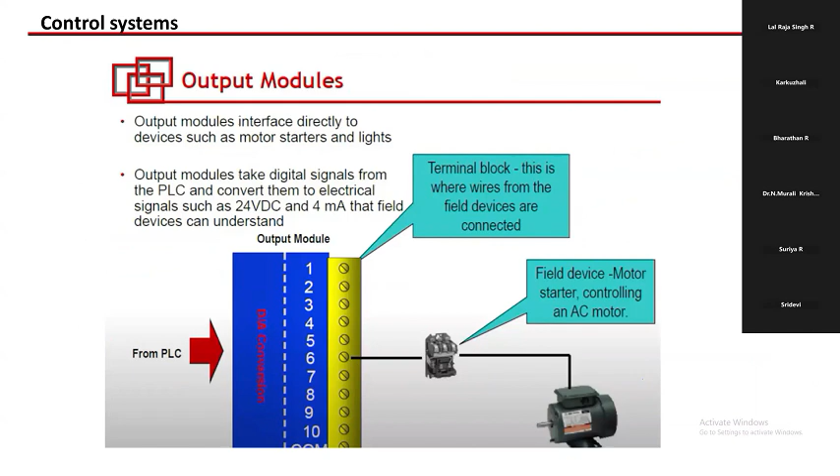So now I'm coming to automation. We can use this control system with robots or computers to handle the process without any human interference. You can use all this to monitor or control the production process.

It can be any kind of automation, like fixed. Mostly in robotics automation, fixed automation is used. Even you can use flexible and programmable automation also.

So if you want to integrate robotics in your production line, we have to identify the automation opportunities first. Then we have to choose the right robot - already I told about many different types of robots.

So we have to choose the right robot and automation system. Then based on that, we have to design an implementation strategy. Then we have to address the cost of the plant and workforce readiness - everything comes into it.

Then only it will come to the real world example or case study. So I will show some case studies of what people did for BMW and Tesla. I will show some videos at the end.

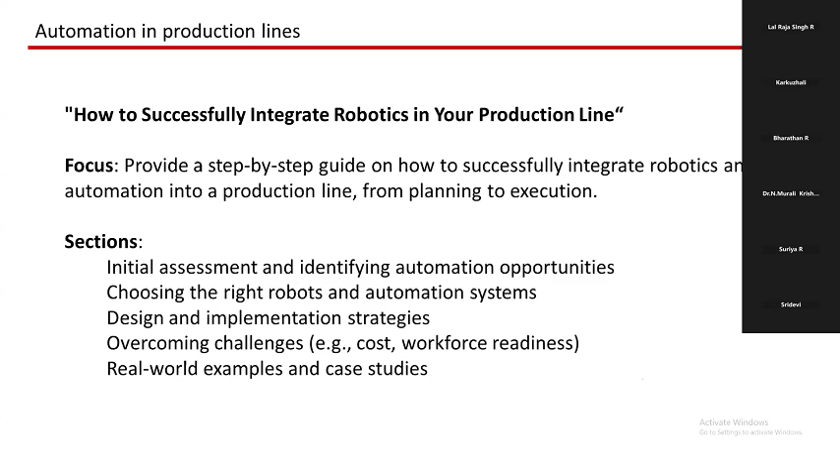Also, the role of collaborative robots plays a very important role in modern production lines. Collaborative means it's called cobots - usually they call them cobots - which work alongside human workers in the production environment. This is not only in automotive industry but also electronics and food processing. Nowadays, human-robot collaboration is really very essential. That is called cobot implementation, as I mentioned, with human and workplace interaction.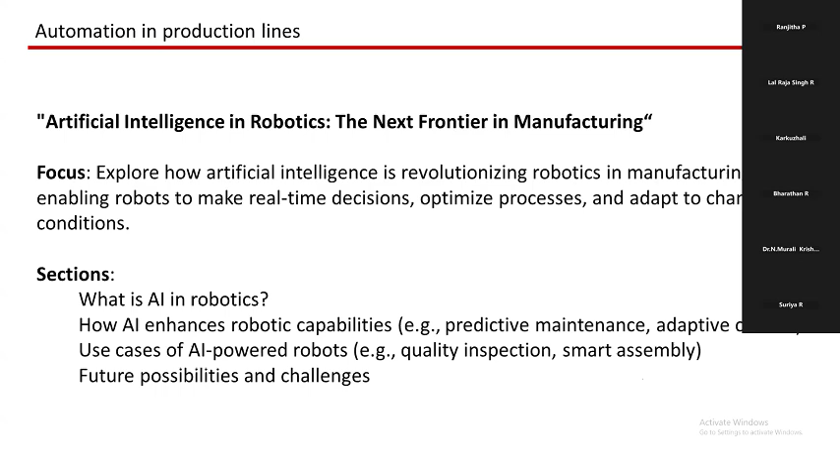Next, people are using artificial intelligence in robotics - that is the next frontier in manufacturing. AI will enhance robotic capabilities like predictive maintenance and adaptive control. We can also use AI-powered robots for quality inspection and smart assembly. In all these cases we can use artificial intelligence - it involves some future possibilities and challenges also.

Also, we have to do cost-benefit analysis in the production line. That is also very important - how it affects things in the short term, meaning the initial investment, and long term savings like increased productivity, lower labor cost, or reduced errors. These are all things you have to keep in mind.

Cost of implementation is also important to take into account. Again, quality control - robots can be used for quality control that will improve consistency in the production line, through visual inspection or defect detection. You can use machine vision systems for quality assurance, improving consistency.

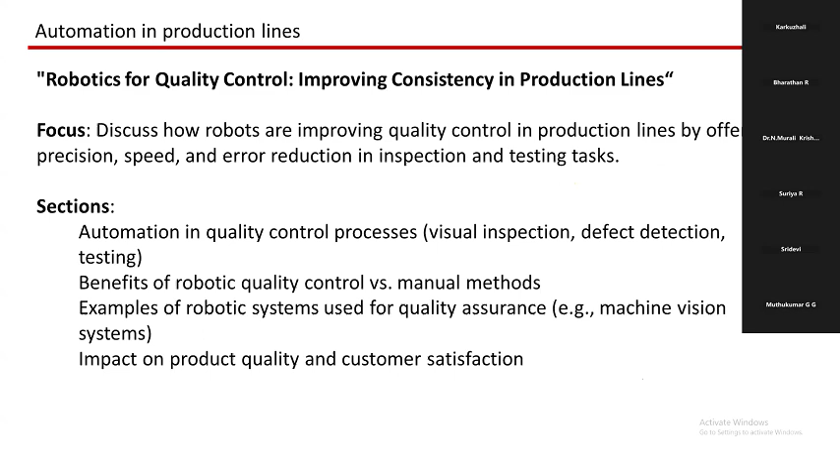Nowadays, Internet of Things and big data are also mainly used in enhancing the automated production line, because they enable real time data collection, predictive maintenance, and enhanced decision making. These are the real benefits of IoT and big data, so people are using them in automated production lines.

So these are all the already three things I discussed - the era of smart manufacturing and robotics. The collaborative robot: collaboration between human and robots without any barrier or cages, also flexible and adaptable to different tasks. Next is artificial intelligence integration, which leads to enhanced decision making and flexibility. Also you can use machine vision systems for quality control and inspection tasks.

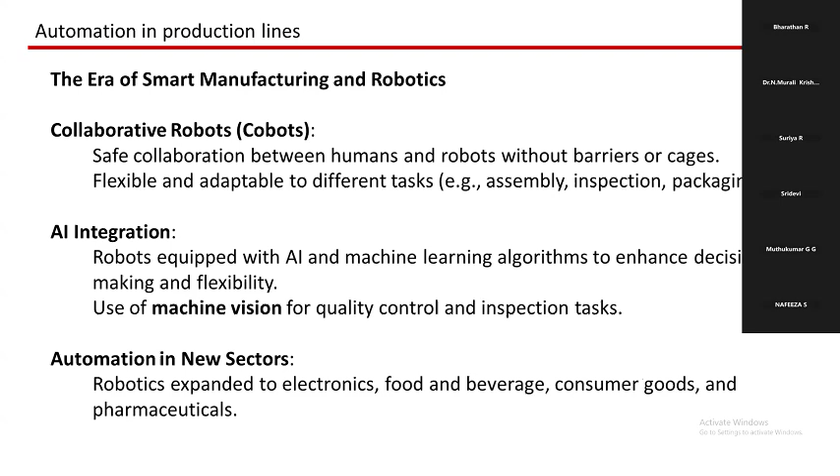You can expand this not only to the automotive industry but also electronics, food and beverage, pharmaceuticals, consumer goods - these are all areas you can implement it. Also, coming to Industry 4.0, IoT, advanced robotics, and big data play a very important role. Nowadays Tesla uses robotics for precise assembly - we will see some things I will show you.

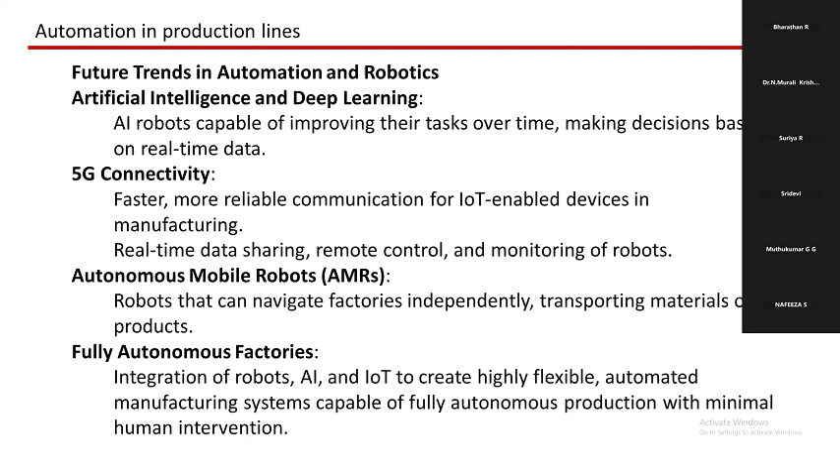Coming to future trends, mainly artificial intelligence and deep learning, 5G connectivity - these are future trends in automation, along with fully autonomous factories. Also certain challenges exist in the evolution of robotics and automation. Mainly the initial cost and workforce adaptation. Once that is done, there are certain technical limitations. Then you have to think about safety and ethical concerns. These are all the challenges.

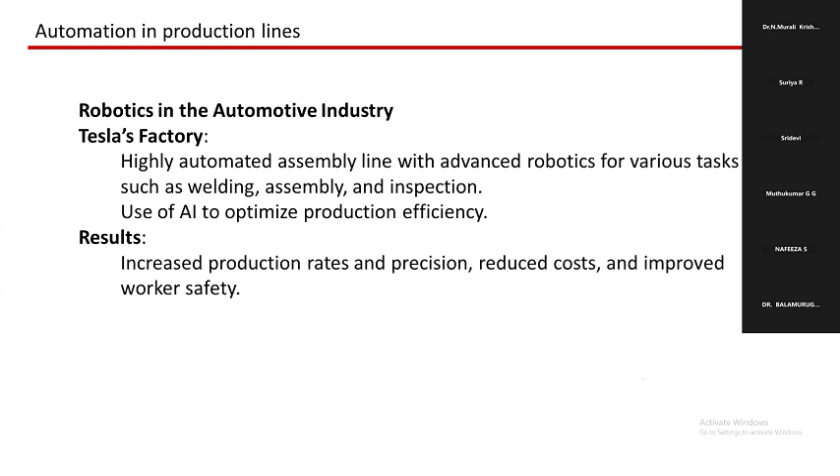So we will see some examples now of how they improve production rate and precision. First I will show you a short video, and then I'll conclude with that.

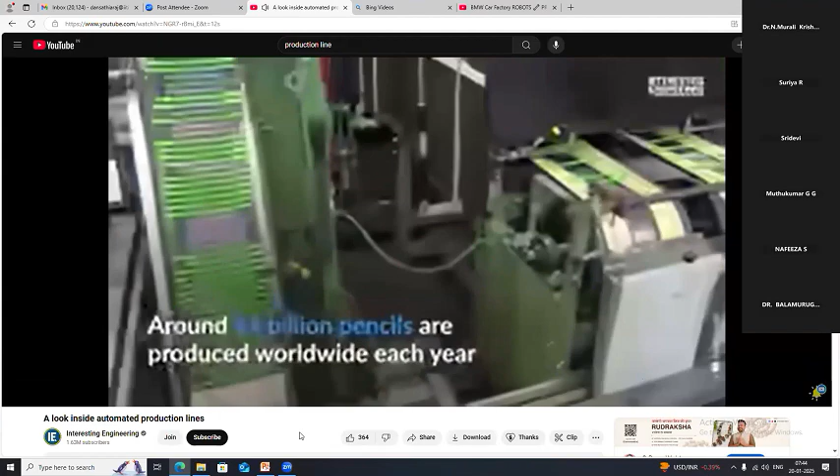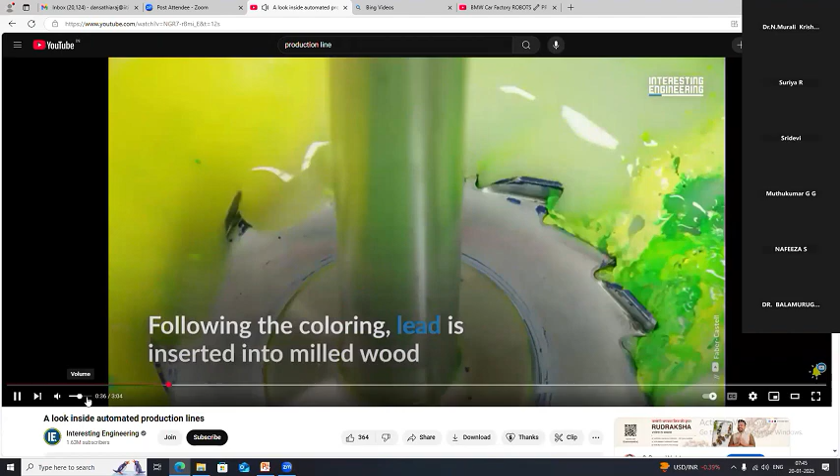You can see a simple pencil and how it's automated - 14 billion pencils, how they mix the clay, graphite, and colors. They are inserted into milled wood, and all of it is an automated process - you can see how they are glued and made into pencil shape.

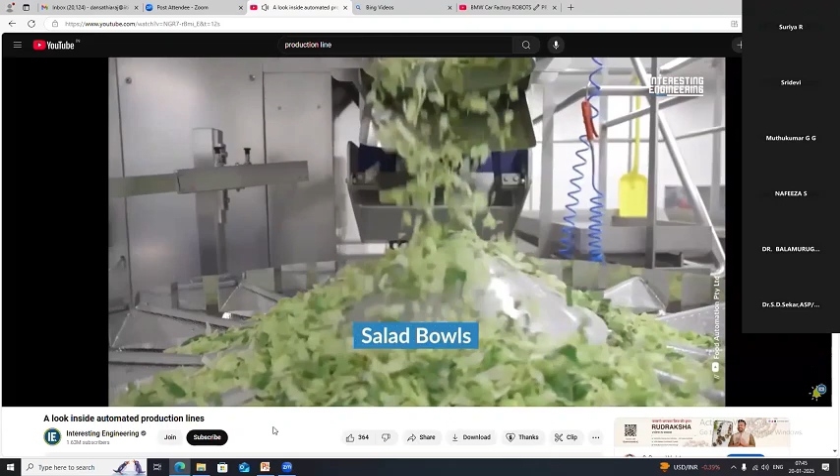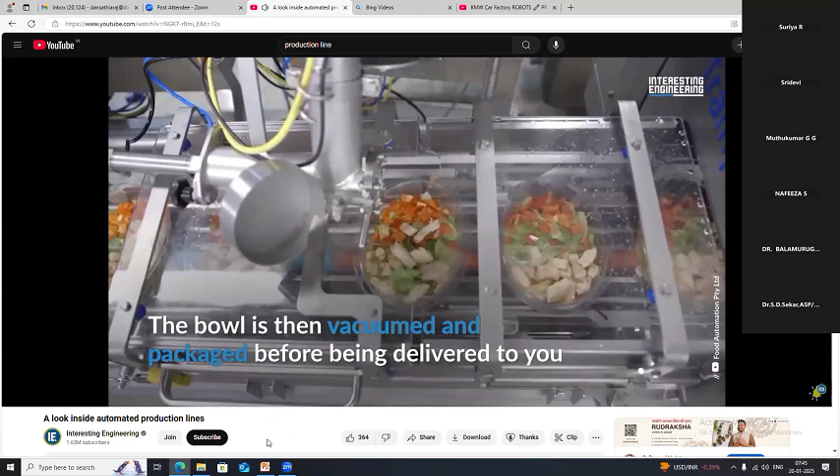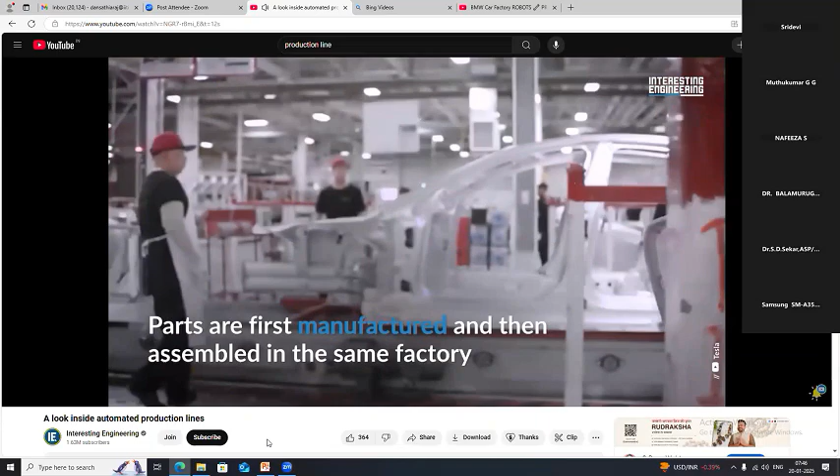Another example of how ingredients are made into different food products, like salad packaging industry - you can see different salads. Then the Tesla car, fully automated line - you can see it doing pick and place and then spray, performing manufacturing operations. All the parts are manufactured and assembled in the same factory.

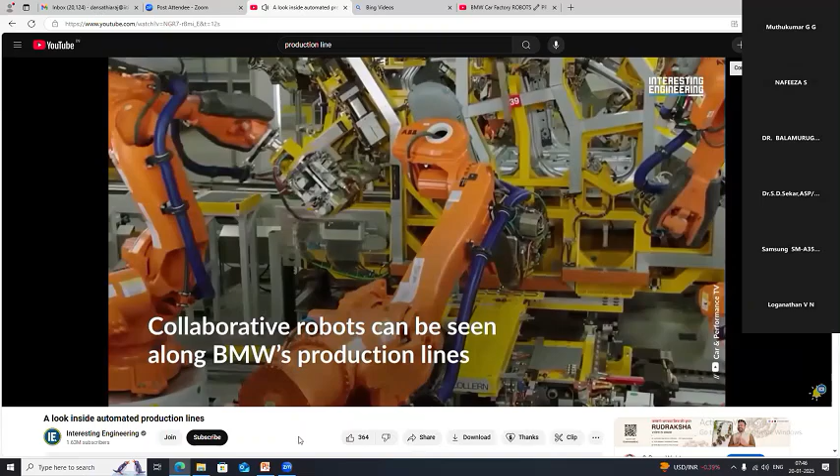You can see the automatic painting process. Then also this BMW car - you can see all these articulated robots involved. I hope you saw where it is used - mostly in welding, assembly, inspection, almost all areas.

So this is my summary: based on these features, manufacturing will be highly automated with robots and humans working together in a more intelligent and flexible production environment. This ongoing evolution of automation and robotics, I hope, will continue to drive efficiency, quality, and innovation in manufacturing across many industries.

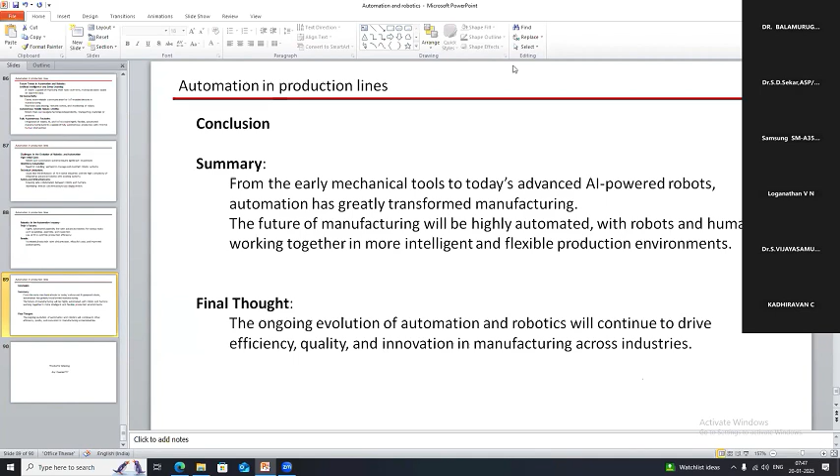Unmute yourself and raise your question if any. Hello, sir, myself Dr. Manish. I did my PhD from IIT Hyderabad under the guidance of Dr. Mayan Surya, sir. Nice to see you here. Thank you. I am presenting here, teaching in CPET.